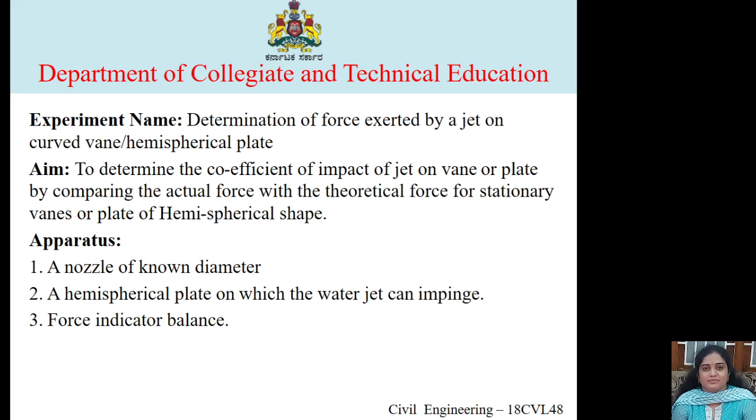So what are the apparatus required? The nozzle of known diameter, a hemispherical plate on which the water jet can impinge, and the force indicator balance. Next, the constant steady supply of water with means of varying discharge, measuring tank and stopwatch to measure the actual discharge. These are the apparatus which are required for this experiment.

Then we'll see the theory for this experiment. The apparatus consists of a water jet flowing from a nozzle with a high velocity which is connected to a high head pump main or an overhead tank. The pressure head of water is converted into a velocity head by the nozzle which discharges the water into the atmosphere. The jet then strikes the plate. The kinetic energy of the jet is transmitted to the vanes or plate which lift the vane upwards.

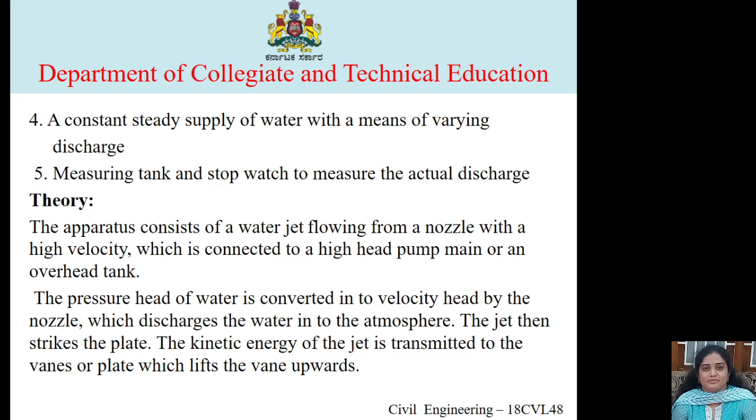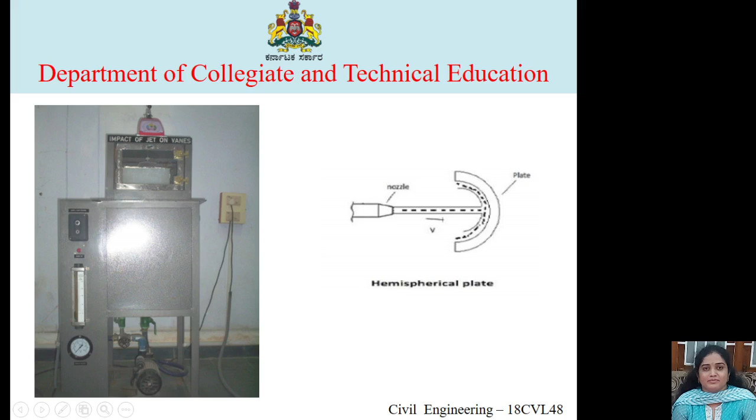So the procedure for this experiment is: fix the required diameter of the jet and hemispherical plate in position. Note down the measurement of the measuring tank, which is used to calculate the Q actual. Switch on the pump and set the weighing machine to 0. The weighing machine is kept at the top; here in this figure it is in red color. So it should be set to 0.

Allow the water to flow through the nozzle by adjusting the delivery valve. Note down the actual force exerted by the jet on the hemispherical plate from the weighing machine. Note down the time required for every 10 centimeter rise of water in the measuring tank. The trials are taken for different discharge. You need to repeat the experiment from steps 4 to 6 for different trials.

In brief, in this procedure, we allow the water to strike the plate, and then we will calculate F actual, FA, which is in kg. Then F theoretical for hemispherical shape is given by 2 rho A V square by g. Rho is the density of water, A is the area of the jet or nozzle, and V is the actual velocity. So for that actual velocity, you need to calculate Q actual.

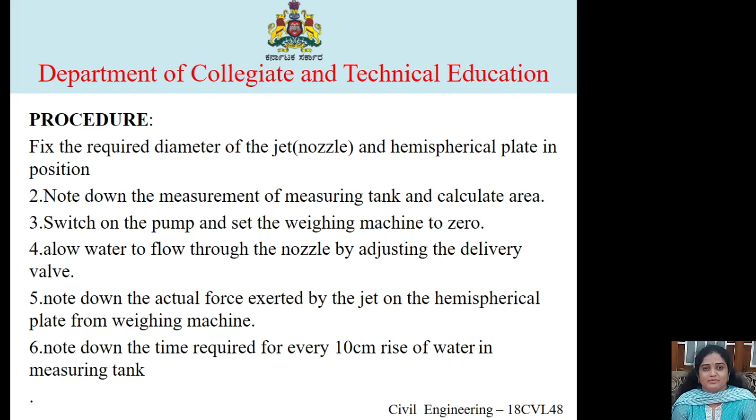In the calculation part, we are going to use Q actual is equal to AH by T, where A is area of the measuring tank, H is the rise factor in the measuring tank in meters. The rise factor is nothing but 10 centimeter. You can take lesser or more also, but generally 10 centimeter is taken. For 10 centimeter rise, what is the time taken in seconds? That will give the Q actual.

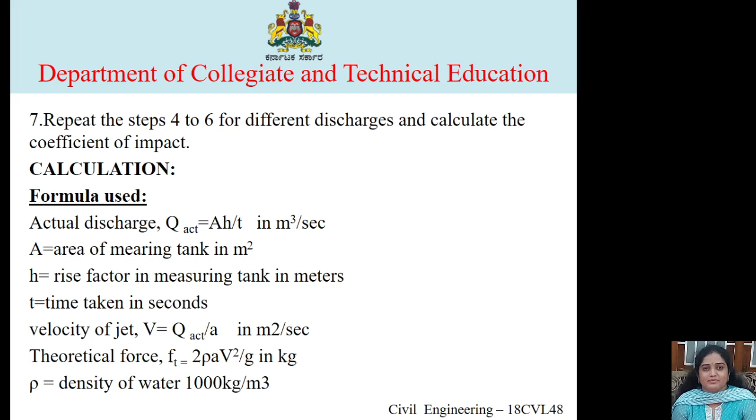From that you will calculate V, because Q is equal to A into V. So you will get velocity in meters per second. From that you can calculate FT. Rho is 1000 kg per meter cube. g is acceleration due to gravity, 9.81 meters per second square. F actual is directly from the force balance indicator, and the coefficient is calculated as FA by FT.

So in the observation, some of the measurements you need to note down. Shape of the vane is hemispherical. Diameter of the jet, small d, in meters. Area of the jet A is equal to pi by 4 into d square. Then dimensions of the measuring tank, that is the length, breadth and the area.

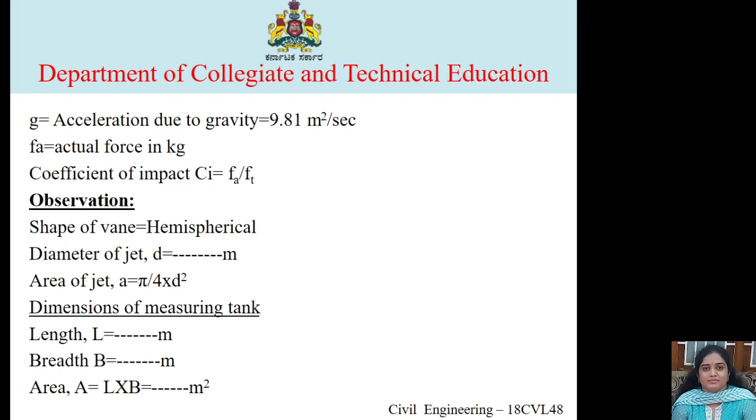This is the tabular column. Serial numbers are for different discharges. By controlling the valve, you can attain this. Then type of the vane is hemispherical plate. Actual force is directly from the force balance indicator. Rise factor H is 10 centimeter. Time taken is noted down during the experiment for different trials, because when the discharge is varying, the time also varies.

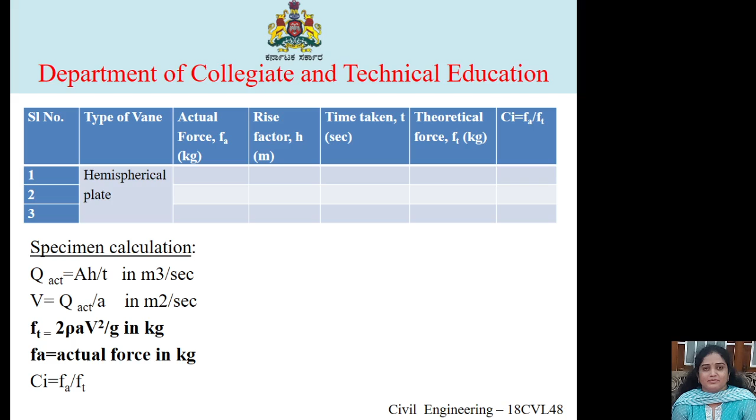Then the theoretical value FT is given by 2 rho A V square by g. Then Ci is calculated, that is F actual by FT. These are the specimen calculations, how to do the calculations for each and every value. After 3 trials, the average of 3 will give the coefficient of impact of jet for the vane.

So the whole experiment can be repeated for different discharges. This completes the experiment. Thank you.